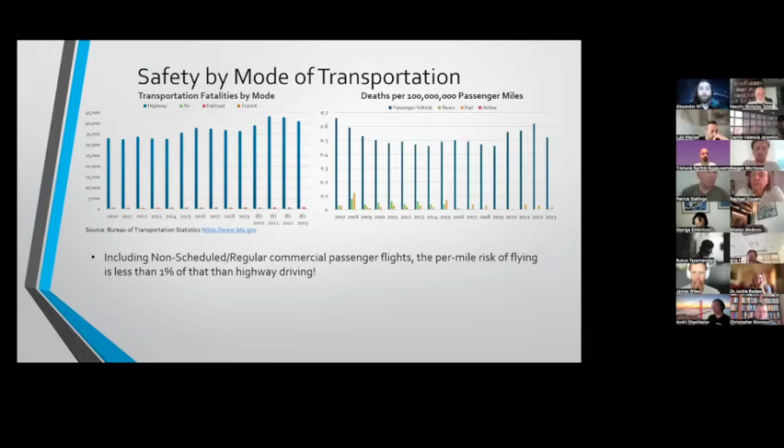In order for an aviation system to be safe, it has to be capable of frequent operation, because there's no such thing as a perfect system. The whole point of testing is to reveal outliers before it goes into operation and puts property and people at risk. So you have to be able to operate it very frequently.

The more complicated a system is, the more chances there are for risk on board. A healthy regulatory environment is essential for analysis and validation. You can't just design it and say okay, it's good to go. You need independent people checking off. Even if you did a fantastic job and got everything perfectly right, you want someone else to say that you also got it right as well.

Imagine going to a show and there's a comedian and no one's clapping. That external validation is critical.

A lot of it also comes down to accountability and safety culture being absolutely critical. The mindframe that accidents will happen doesn't make them acceptable, but there needs to be a thorough investigation to figure out what went wrong, because there's always going to be multiple things.

On this slide we have two blocks of images showing things at the opposite ends of the spectrum. We have the 737 MAX, where there were cultural reasons why it began failing - the regulatory environment fell apart and the thing started crashing. You have the space shuttle and the Hindenburg as well, things that flew maybe once every couple of months. The space shuttle flew 135 times. Airships had maybe hundreds of flights in their heyday at most.

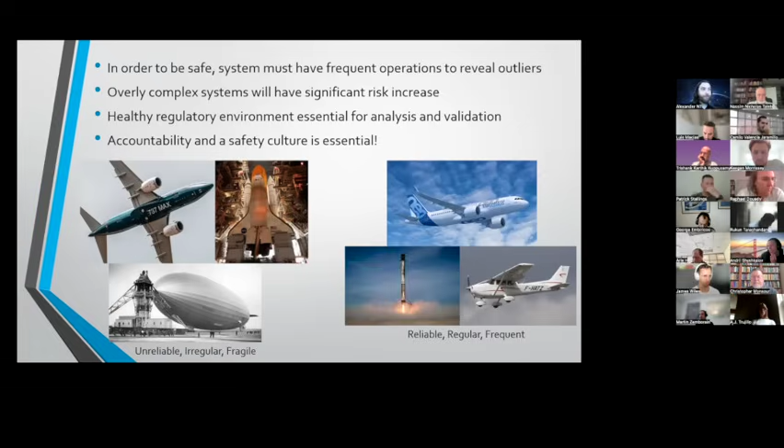The A320 was an incremental upgrade to an older aircraft, but it was focused more on efficiency, weight, the engines, and the wing. They didn't try to force or shoehorn anything in there that was unacceptable for an aircraft of that age.

So here are the transportation safety numbers. This is a plot that shows total fatalities worldwide on embarked passengers, and it also shows the number of people who have flown every year. You can see that air travel grows every year.

There's one exception from five years ago - I'll let the reasons why be an exercise for the reader to determine. But you can see the overall trend of air crashes is going down. And if you look at the years where there's an increase from the previous year, it's almost always driven by one or maybe two particular instances.

There's a theory, I think, about one thing dominating the statistics for a period of time. I think there's a book - you can look it up, it's probably on Amazon.

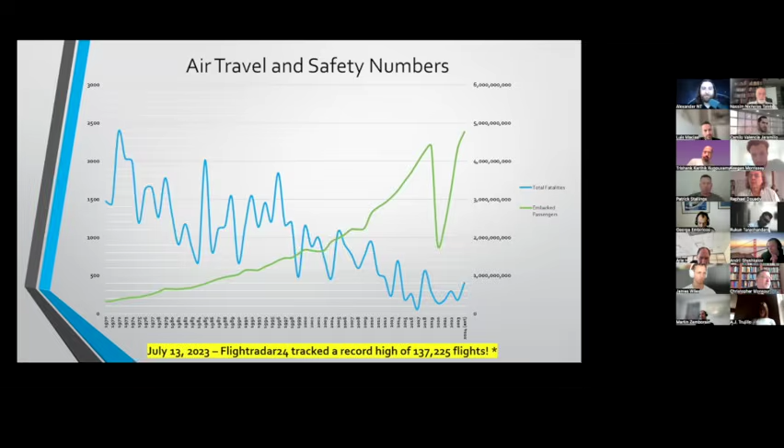In order to make flying safe, these complex systems have to have one of two types of robustness: fault resistance or fault tolerance.

Trees are a really good example of what I'm talking about here. Fault resistance means you are designed to take any stress applied to the system and come out on the other side intact. So a tree trunk is very strong, but once it fails, it's done. There's no backup, there's not a second trunk applied to it, unless you're one of these clonal trees out in Utah or something.

That is fault resistance. The tree is designed to withstand any force that can be thrown at it. And if an outlier comes along and is able to overcome it, you're done.

The other method is what's called fault tolerance, and that's like leaves on a tree. If you go out and pluck a bunch of leaves or even take off a few limbs, the tree can still continue because it has alternates. It's got redundancy built in, and it can keep going.

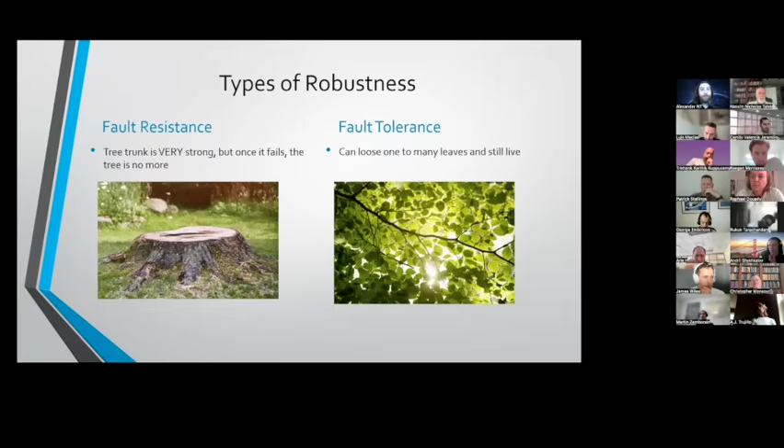So when it comes to fault tolerance, let's take a look at the Boeing 777, one of the last really great products that Boeing designed before they started having some of the endemic issues we'll go into in a few minutes. But they have multiple engines. That's fault tolerance. If one engine fails, the other one can keep going and get you back home safely.

Modern aircraft are designed in such a way that there is no point from gate to gate, from departure to arrival, that a single engine can fail and the other engine does not provide sufficient power to get you back on the ground safely in one piece.

About a year ago, a Lufthansa flight at the worst possible moment on an A320, a little EU regional flight, had an engine blow up at the exact worst possible point, and the passengers went through the ordeal of having to go back to the airport and deal with a bus and get another plane before they continued on with their destination. That was their day.

Fly-by-wire is a really great technology. That's where instead of having a single cable connected to the stick that moves the flaps, it's actually a computer sending digital signals to the mechanisms that control the surfaces, which means you can route multiple paths of these cables. So if one gets severed, you have two or three others available to go.

You have multiple computers. This is one of those systems that not only improved efficiency but improved safety as well. And then you have to have redundant sensors as well. If your safety is dependent on knowing exactly what your airspeed or your altitude is, you are absolutely not going to have one sensor, because if it breaks, you're in big trouble.

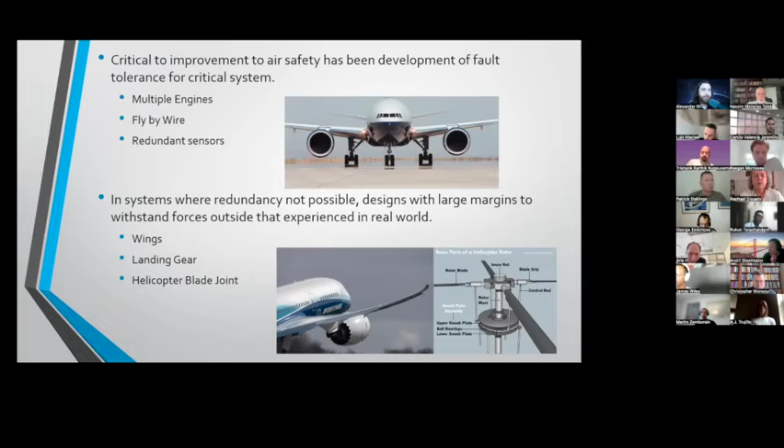If it has happened before, you must design to accept that stress, whether it's clear air turbulence or some kind of rotational forces on a helicopter. Every aircraft that flies in the U.S. is required to do this, but Boeing has this really great video of it - the Boeing 777 wing test.

The wing was designed to take 150% of the highest known observed load that an aircraft has seen on its wings, and it had to flex 150% past the deflection point that load would produce.

It made it to 150%, and then they kept going because they wanted to see where it would break. If you have the ability to test to destruction, you always should do so, because you don't know your limit until you have reached it. And that's what they did - they tested this to destruction.

It created a shock wave. It broke everything in the hangar, but that was on purpose. And it proved that this wing was ready to take whatever could be thrown at it that had been seen up until that point. At that point, they had almost a century of experience with what airplanes had to go through.

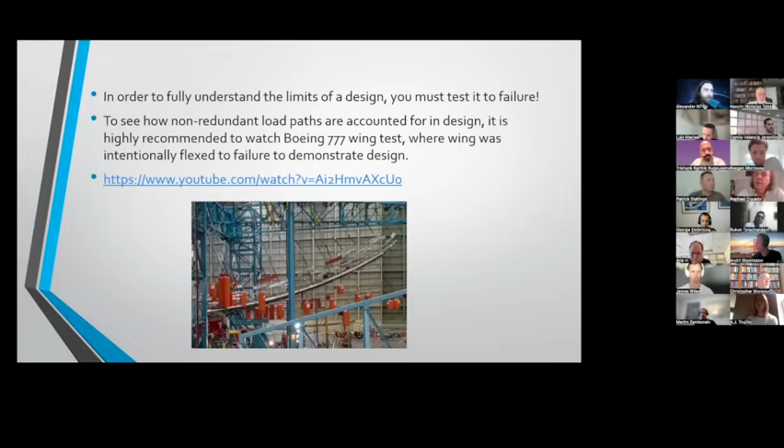We won't watch the video, but it's a great one. Part of what drives aviation safety and so many other things, whether it's computers or medical - this was discussed with, I believe, insurance and reinsurance - is what's called the Swiss cheese safety model. It is critical. You assume that parts will fail. They're going to. One way or another, something's going to break.

The design and organization of your system, whether it's human systems for air traffic controllers, the way a pilot and co-pilot interact, the computer systems, the engines, the hydraulics, even the doors, you have to have different layers so that when one thing breaks, there is another part or a component or a program that catches that fault before it propagates to a fatal result.

Obviously you don't design components to fail. These aren't sacrificial parts. There are a few parts on an aircraft that are actually designed to break, and when they do, a light comes on as a warning sign, but those are the exception. You need to build a system where failure is accounted for in every single possible component from day zero.

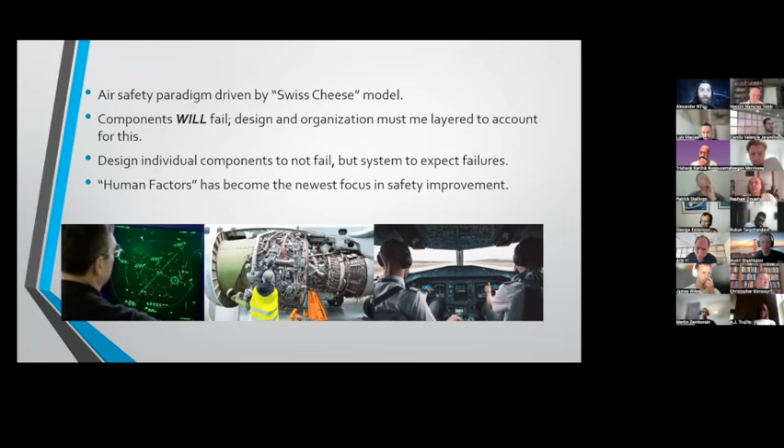Each layer of the Swiss cheese has holes in it, but the next layer doesn't have a hole that's lined up. The area where there has been a lot of focus over the past decade or two is what's called human factors, which is how people operate within the system.

So here's a great picture of the Swiss cheese model. If it looks like it came from Wikipedia, it's because it did. Each of these red lines is a hazard. Each slice of Swiss cheese is a layer of protection. In this case, there are only three layers, and one thing gets through, but in general the layers are either more robust or you have more of them.

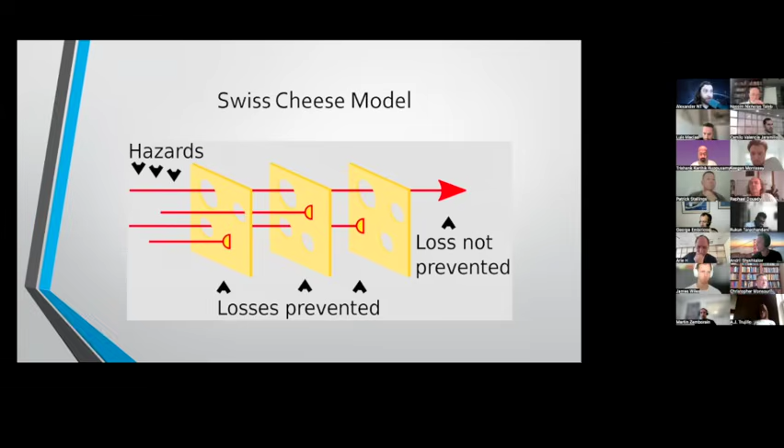So we're going to talk about an example that happened about four years ago on a United flight out of Denver going to Hawaii. A Boeing 777, fantastic aircraft, suffered an engine failure. Right here, it lost a blade on one of the engines.

That's not great. These things are traveling, sometimes these tips are going faster than the speed of sound, and this isn't like a diesel engine with a big heavy block on it. If something comes loose, it can do damage. As you can see right here, this is actually lubricant oil that was on fire, not the full engine itself. So this is one of those situations that looks incredibly scary.

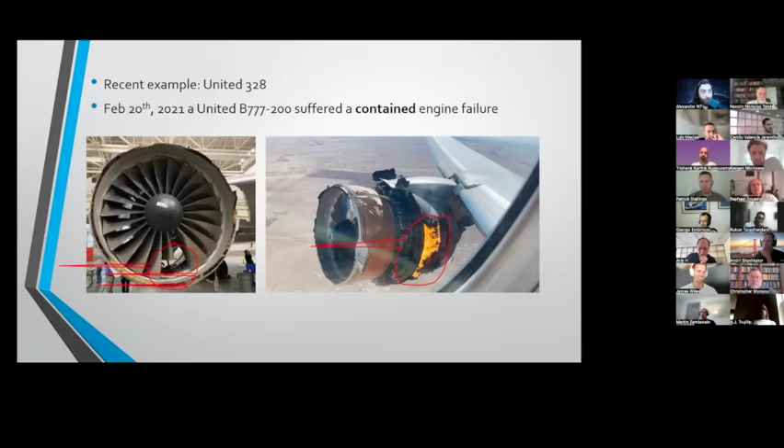The plane turned around and had to go back to Denver, and they had to get a new one so everyone could continue on their vacation to Hawaii. But the engine failure was contained. That's the key word here. The engines on the Boeing 777 were designed from day one to withstand losing an engine blade inside them.

If it got flung off from the base, it was designed to contain that, the same way Kevlar in a bulletproof vest is designed to stop a bullet. It's not going to be great, but it's not going to pierce through. The engine covering was designed so that if there was a loose blade in there, it would allow it to pass through and fall out. The 777 was designed from the get-go to have engine-out capability, which means that if you lose one of the engines, the other one is going to get you back home safely.

The engines on some of these models are rated to cover almost six hours of flying on a single engine, in case you're over the Pacific and you have to travel a thousand miles or more to get to an airport. And the crew in the flight deck, and the flight attendants as well, are all trained for almost exactly situations like this.

There's a checklist they go through line by line. There is an order of operations and how they communicate with each other, but it's a little bit flexible, so the co-pilot isn't locked into the pilot's authority. If the co-pilot sees an issue, they have the authority and capability to raise that issue, to say our readings are saying this, we need to do that.

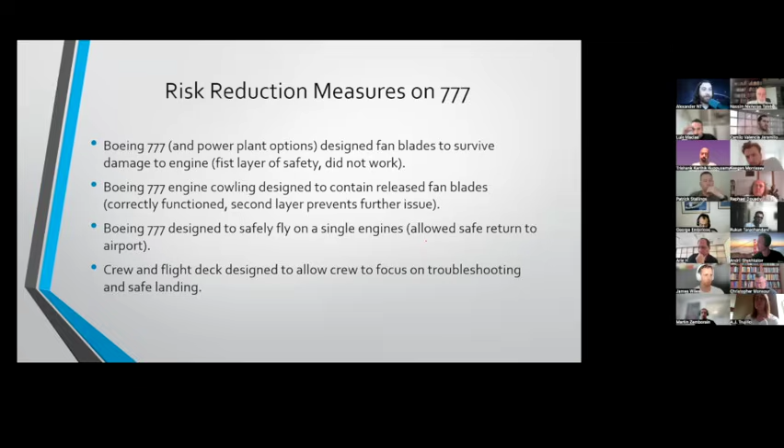Unfortunately, the system came about through incidents where planes crashed because there wasn't good training, or the dynamic between the crew was not healthy or productive. But in this case, it worked very well.

The A380 suffered two uncontained engine failures. This is where something happened on the engine beyond what they had seen before and what was designed for, where a fan blade came loose and pierced the engine covering.

To analyze and figure out what the problem was. Keep in mind that despite the fact that these are the same model aircraft, these are completely different engine designs from different manufacturers. But again, there was redundancy.

When the blade pierced the wing of the Qantas flight, it did not sever any critical systems. Everything that it severed was either a non-critical system, or there was a backup that was able to take those to reroute the critical path. And both planes made a safe landing, and both of them were returned to service, and you might still be able to fly in one of them.

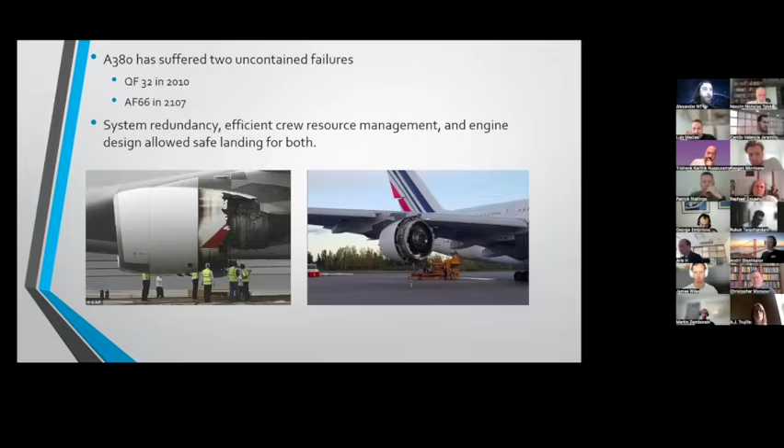The 2018 fatality that we discussed earlier in the presentation was on a Southwest flight, and this unfortunately was caused by, again, an engine failure where one of the blades broke off in flight, ending the 9-year safety streak of the U.S. And this was in a CFM56 engine, the most built jet engine in the world. It's around everywhere. Everyone in this group has flown on one. However, in this particular case, it was an older engine design, and the maintenance did not detect fatigue that was inside the engine.

This was one of those events that potentially prevented several other events down the road because they realized they had to be more aggressive about inspecting for this kind of damage and then rectifying it. And in this case, the engine was not designed to contain a blade failure. The blade left the engine and went through the window, striking a passenger, leading to a fatality.

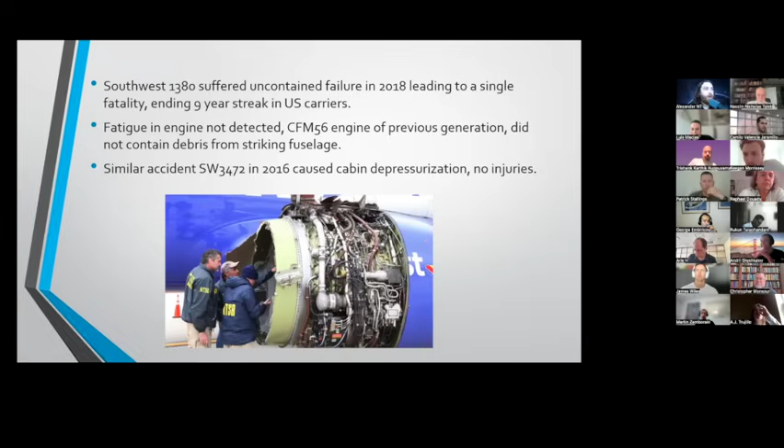A similar instance had happened two years before on another Southwest flight with the same kind of engine, but luckily it only ended up in depressurization and a diversion, I think, to Pensacola. So maybe ending up in Florida, maybe that you want to count that as a special kind of accident, but no injuries.

So it is critical, absolutely critical when people are working on systems, whether it's aerospace, medicine, or anything like that, my specialty being aerospace, to look at what has led to accidents and incidences in the years leading up to the beginning of your work and learn the lessons from them, because all of these accidents have had very thorough investigations. Some of them have been multi-year efforts, and some of them have even revealed almost new types of science.

The most famous is the de Havilland Comet, where this is what really drove research and understanding of metal fatigue and cycles. This happened because on the upper side of the airplane, there was a little window that had square corners and not round ones. This is why you don't see square windows on aircraft.

The pressurization caused a buildup of fatigue in the metal around this window, causing it to crack, and they lost two aircraft the same exact way under mysterious circumstances. And they actually built a swimming pool the size of this airplane and pressurized it until it failed to figure out what was going on.

The DC-10 revealed that if you have a system that is critical to the safe operation of a flight, you cannot have a single non-redundant path. In this case, there were cargo doors separating in flight, severing hydraulic control lines for the engines and all the control surfaces on the back end of the aircraft. Losing one was enough to lose control of the whole airplane.

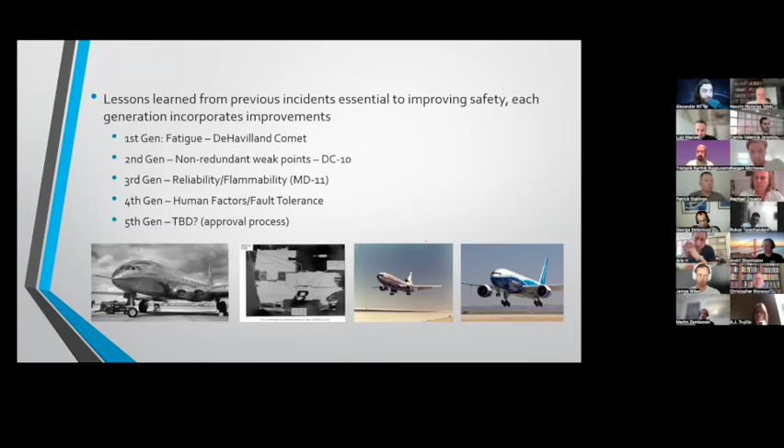On the topic of the 737 MAX, there was a huge amount of testing done on the airplane, but it wasn't being done right and it wasn't being done smart. There was a major flaw in the design and it was getting through in the testing.

Lessons from previous accidents were ignored. The MD-11, successor to the DC-10, had a system on board that relaxed stability for fuel efficiency, but this led to two crashes because it did not behave as it should have on two different cargo flights on landing, causing the plane to flip over. Boeing knew that if you had a stability augmentation system on board, you had to account for possible accidents, and that was not followed.

Human factors were ignored. The pilots on board the 737 did not know there was a stability augmentation system on board for the trim. It was not mentioned in the manual anywhere. When the system started going into runaway conditions, the crew were immediately overworked and did not have the energy to manage the situation. In both cases, the crash was essentially guaranteed. Boeing did not train them or tell them that if you've got a stabilizer trim issue, you need to press this button to disengage the system.

Another thing, and this is kind of sad, is that there was an insufficient response to the first crash. The reason why was because it was Lion Air. Lion Air had already had a crash or two on other versions of their aircraft at that point, and they were generally seen as not a safe airline, one to be avoided. There had been times their certificate was put on hold, or they weren't allowed to fly into certain countries because they weren't maintaining their aircraft correctly.

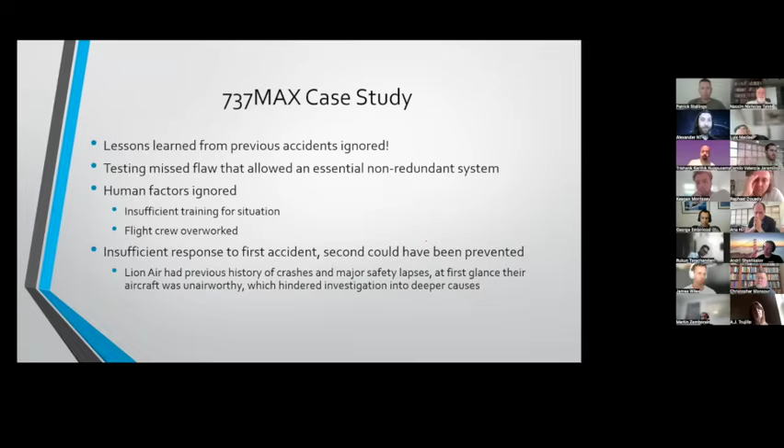So how did this happen? In this particular case, we're going to talk about the Alaska Airlines flight about a year or two ago where the door blew out and someone lost their cell phone. Very lucky there were no fatalities. It turns out there were no fatalities because the person sitting in that seat missed their flight, missed the connection. Boeing was outsourcing responsibility and quality control to Spirit AeroSystems based out of Wichita, Kansas.

That was the first layer of Swiss cheese that was penetrated - there was not the proper oversight for the QC for this. The second layer was the technician failed to install the bolts on the door. Even though the quality control for this door wasn't great, had the technician installed all the bolts correctly, it would not have led to a failure. It would have remained in place. But that did not happen - the bolts were improperly installed. I believe some might even have been missing.

And the final layer of Swiss cheese that this fault pierced was the inspection. Every time you do maintenance work, especially on something like this, you have someone else inspect it, and the inspector did not detect that the bolts were installed incorrectly. That is a major, major lapse.

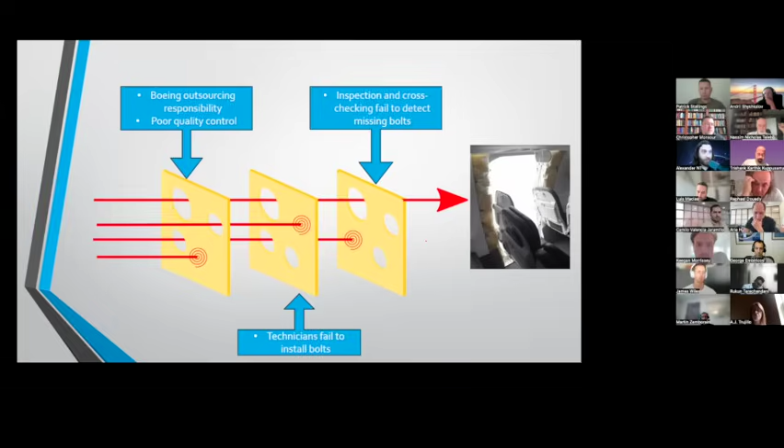I worked at Delta in their engineering department for three years, and every time we had a work order done, the engineer had to sign off on it with their name. That's a level of accountability. A technician had to install it and sign off with their name, then a different inspector had to come in - and we did catch things that had been installed incorrectly, or design work that needed to be revised to meet our standards. But it was always caught because we had these multiple layers and we adhered to them.

So here's a little bit of a summary of how long it takes for planes to crash for their very first time when a new model enters into service. As we take a look, I have two of them highlighted in red because they are two very good aircraft with very good designs that, since the last Risk Institute, I've had to update - they went from never having had a crash to now they have.

That's the A350, which had the accident in Tokyo where a Coast Guard aircraft taking relief to an earthquake entered the runway by accident. They thought they had permission to go onto the runway to take off. They did not, and didn't realize this flight was about to land on top of them. Unfortunately, that led to fatalities on board the Coast Guard aircraft. I believe the Japan Air flight had no fatalities.

There were some injuries, but everyone on board survived. It took 9 years for an A350 to have their first accident like that. That's a very good record, especially compared to some other aircraft, like the 737 MAX, which barely made it a year before the problem was revealed.

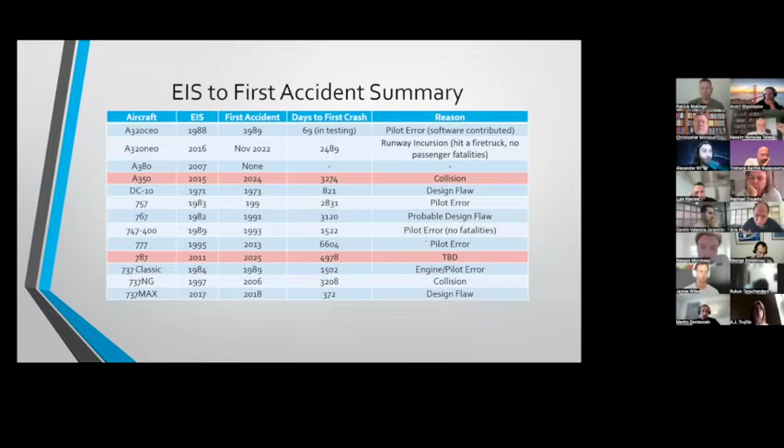The 747 had some issues somewhat early on too, but when you look at the reasons behind these, there are really only three design flaws. One of them was the A320 - it was pilot error compounded by a software design issue. That was found out and immediately rectified, and it was a kind of outlier air show flight. But it illustrates the point that human factors really are what's driving safety, and as a society we've gotten good at them. We're getting better, and we're going to keep getting better.

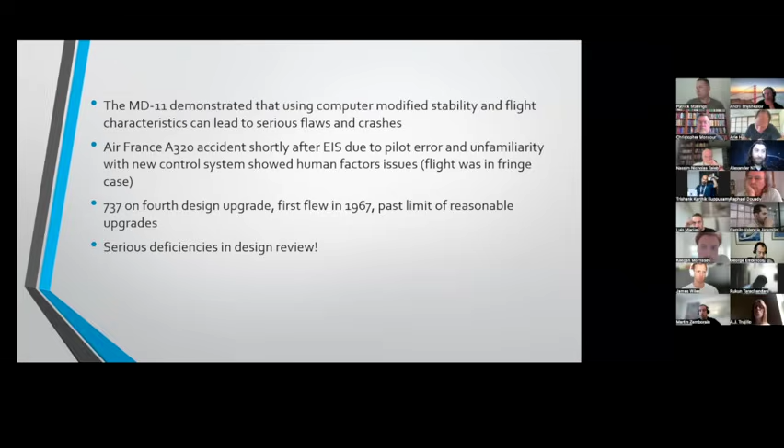The 737's been around since the 1960s. This was the fourth major redesign of some of the components on board, and they really were pushing the limit of what they could do with this airframe to bring it into the modern era. They got a lot of things right, but this was one of the things where they were biting off more than they could chew.

And there's an endemic issue at the company. We have Starliner here, which is very probably going to be the first spacecraft to ever take humans to space but not bring them back. This thing is still not considered operational after about 6 years after its first test flight. Every flight they've done has had major issues, and the entire propulsion section is being redesigned currently as a result.

You have the 777X, the next generation of the 777, which is a great airplane, but again they have so many endemic issues, largely with the management, that this thing first flew in like 2020, and not a single one has entered passenger service yet. They're still testing and tuning the design.

And then, of course, you have the door. A lot of people ask how this came about. It was largely because there were two companies in America driving the commercial aviation market: McDonnell Douglas and Boeing. Boeing was an engineering company run by engineers, looking for problems and tackling them. McDonnell Douglas was a business that happened to be building airplanes. They decided to merge so Boeing could grow their business base and get some of the military technology. But unfortunately, while Boeing was the surviving entity, McDonnell Douglas's management stayed on board, and those issues perpetuated after the merger.

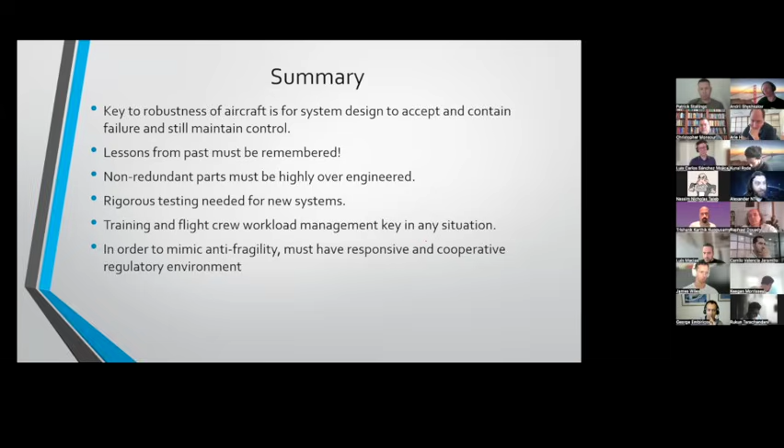So here's a new slide. We're about to finish up with the slides, but consequences of human factors in 2025: we had the Delta Connection flight that flipped on landing in Toronto. Luckily everyone survived in that case, but it was pilot error, inexperienced pilots, and challenging conditions.

We have the really tragic incident that happened in DC where the passenger plane collided with the military helicopter. There was major helicopter pilot error there, incredibly unsafe routing. Even if things were going perfectly, the path that helicopters were supposed to take was unacceptably close to the path that aircraft were allowed to take. No one thought to say, hey, if we're using this runway, helicopters shouldn't be flying here at this time. And then it was an air traffic control failure, because they only had one person working the airport and they did not have the tools necessary to avoid this known problem.

There had been traffic avoidance warnings at this airport multiple times. The same situation had appeared many times before and luckily did not result in a crash, but it was a known problem.

And then we have the Air India flight that happened just over 30 days ago, where the fuel cutoff switch was moved from on to off. This is essentially like turning off the engine of your car while doing 80 miles per hour on the highway. We don't really know what happened yet, why this happened, but it is very likely a human factor.

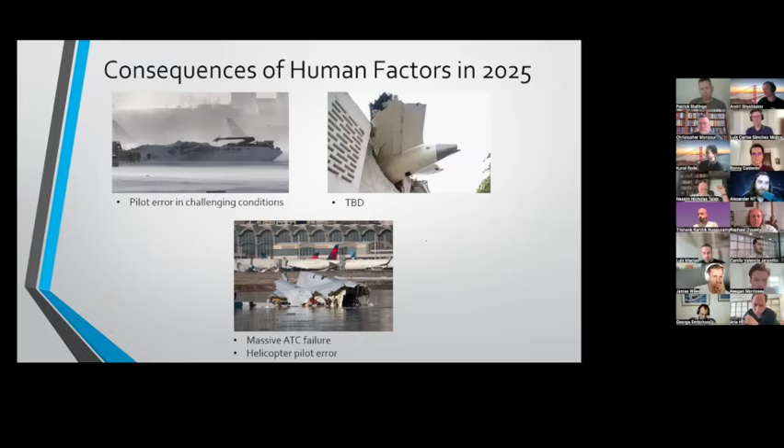And whether or not that was an accident, incompetence, or — and this is a very uncomfortable cause that has happened several times in the past — an intentional cutoff by one of the pilots. There have been crashes caused by pilots on purpose, unfortunately. And I'm not talking about terrorism, individual pilots.